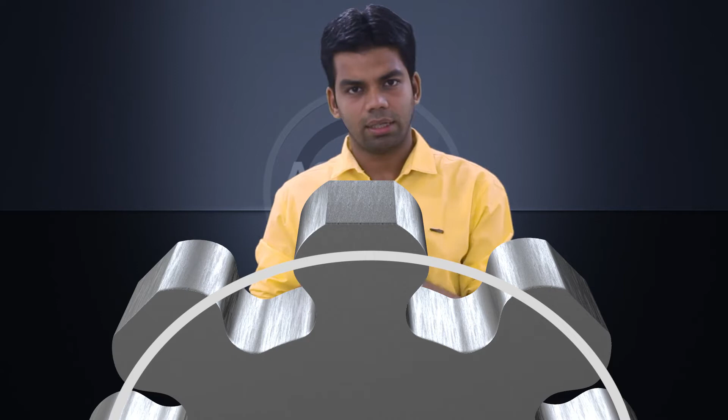The surface at the bottom of the gear, meaning the gap between the two teeth, is nothing but the bottom land. Now the area above the pitch circle up to the top land, the area between the pitch circle and the top land, is nothing but face. What do we call the area between the pitch circle and the top land? That is called face. And the area between the pitch circle and the bottom land is called flank. So these are a few important terminologies.

Next is fillet. As you can see here, a small curve is visible at the end of the teeth, where at the base of the teeth there is a small curve visible. That curve is nothing but the fillet.

Next is the circular pitch. Now what is the circular pitch? So we have seen about the pitch circle. Now in this arc of a pitch circle, if I measure the distance between a point on one tooth to the corresponding point on the next tooth, in this arc of the pitch circle, the distance from one point on a tooth to the same point on the adjacent tooth is nothing but the circular pitch.

Now how can we determine the value of the circular pitch? Very easy. Suppose the pitch circle diameter is d, so the whole circumference of this pitch circle is nothing but pi into d. Now how many teeth are there? Suppose the total number of teeth is capital T. So the circular pitch will be equal to pi into d divided by capital T. If I divide the whole circumference by the number of teeth, I will get just one circular pitch.

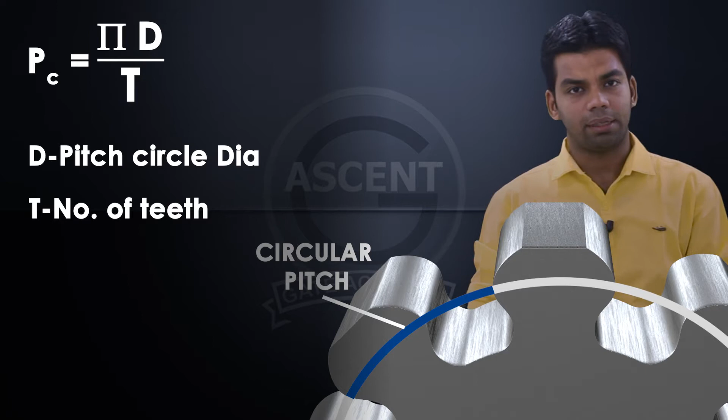The distance between one point of one tooth to the corresponding point of the next tooth is nothing but the circular pitch. So this circular pitch, PC, is equal to pi into d by t. Now, if two gears are in mesh with each other, obviously their circular pitch has to be the same.

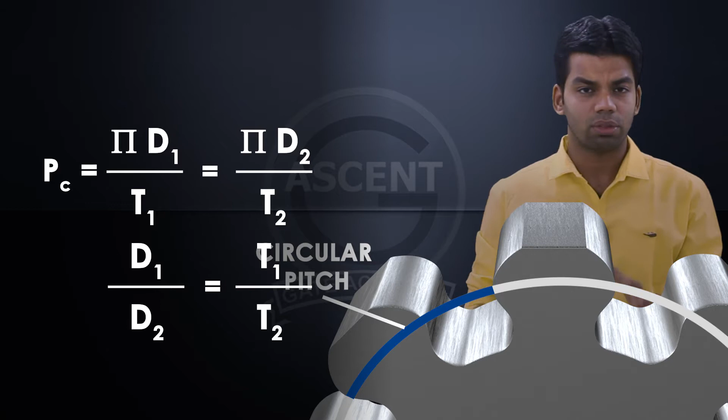So this is very important: if two gears are in mesh with each other, their circular pitch must be same. That means pi d1 by t1 should be equal to pi d2 by t2, where d1 and d2 are diameters of the two pitch circles, and t1 and t2 are number of teeth of gear 1 and gear 2. So you can conclude pi d1 by t1 equals pi d2 by t2, or d1 by t1 equals d2 by t2, or d1 by d2 equals t1 by t2. This is the necessary condition for two gears to be in mesh.

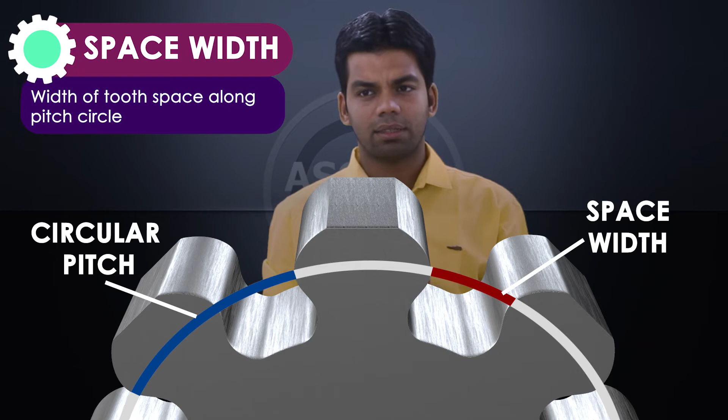Next terminology is the space width. Space width is nothing but the distance between the two teeth.

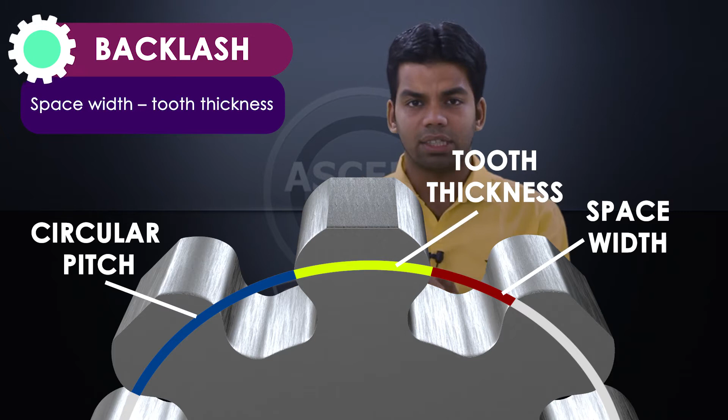So how can you calculate the backlash? Backlash is nothing but the space width minus tooth thickness. Whatever the space width is, subtract the tooth thickness from it, and we get the value of backlash.

Next important terminology is module, M. Module is the ratio of pitch circle diameter to the number of teeth. That means d by t is nothing but module, so M is equal to d by t.

Now we know circular pitch PC is equal to pi d by t, so you can write PC as pi into M. One thing we have seen is that for two gears to be in mesh with each other, d1 by d2 should be equal to t1 by t2, and d by t is nothing but the module. That means if two gears have to be in mesh with each other, their module must be same. Next is the diametral pitch.

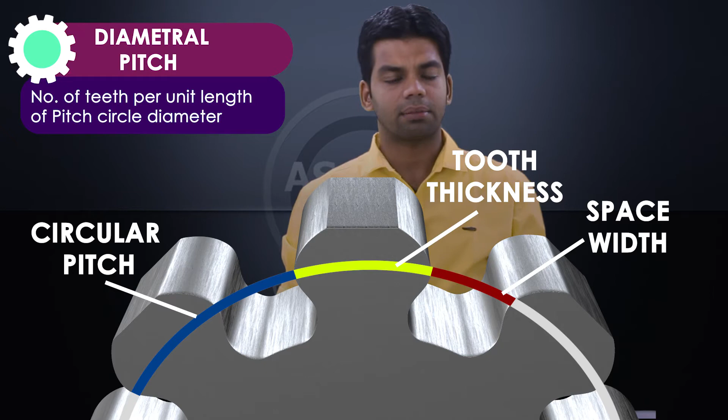Just the inverse of module is nothing but diametral pitch. So how can we define diametral pitch? It is the ratio of number of teeth to pitch circle diameter. The ratio of number of teeth T to pitch circle diameter D is nothing but the diametral pitch P, so you can define P as T by D.

Further, you can write P into PC, diametral pitch into circular pitch, will be equal to pi D by T into T by D, which is nothing but pi. So the product of diametral pitch and circular pitch is nothing but pi.

Next is the addendum circle. Now what actually is this addendum circle?

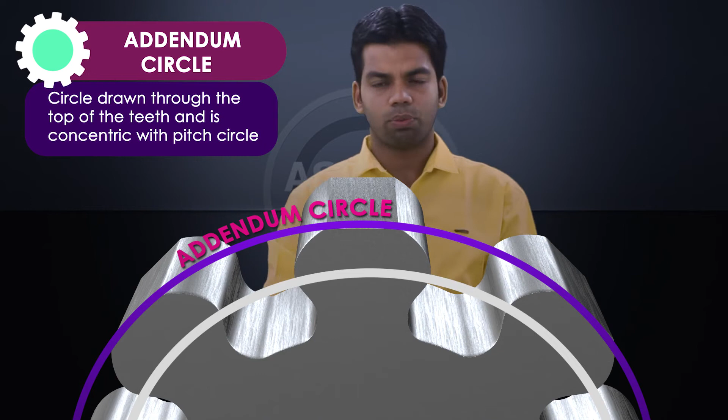In this gear tooth profile, if I join all the top points of the gear tooth, I will get one circle. That circle is the addendum circle. Similarly, if I join all the bottom points of the gear tooth, I will get another circle, which is the dedendum circle.

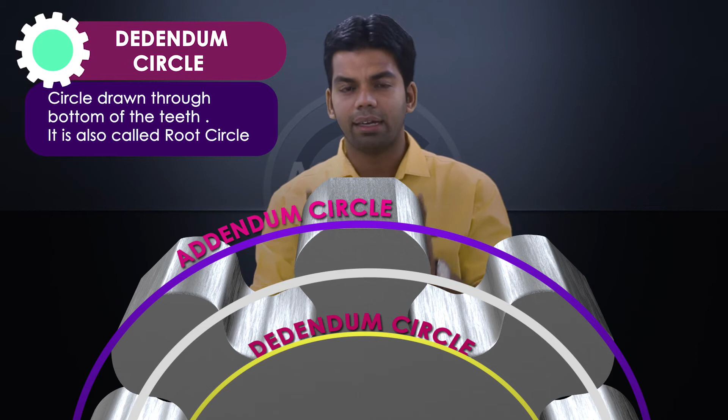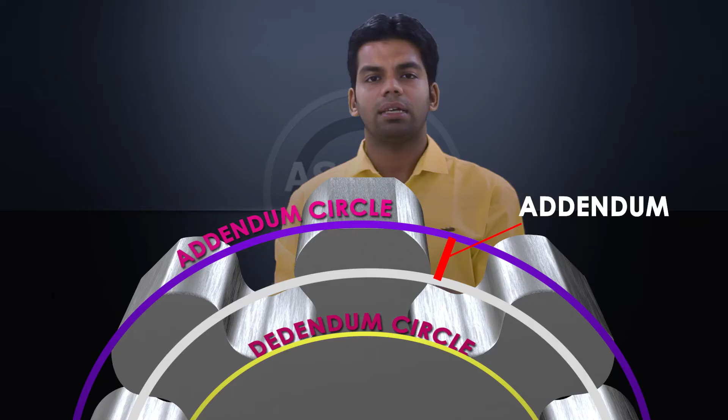Now, the radial distance between the pitch circle and addendum circle is nothing but addendum, and the radial distance between the pitch circle and dedendum circle is nothing but dedendum. The standard value of addendum is one module. If nothing is mentioned about addendum, you can take the standard value as one module, and the standard value of dedendum is 1.157 of module.

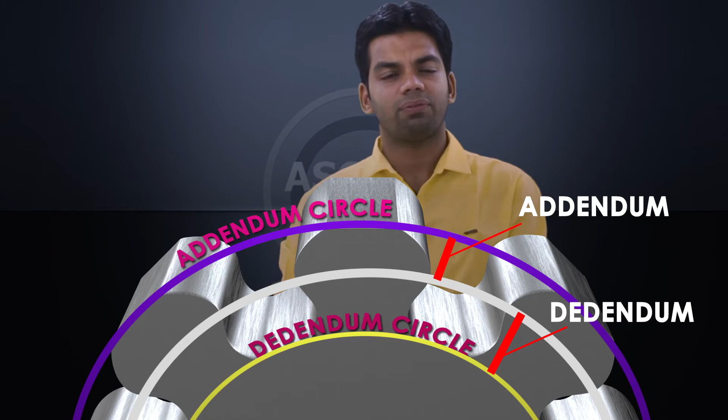Next is the full depth of the teeth. What is this full depth? The total radial distance of the teeth space is nothing but the full depth. That is how much depth this space is having, and that is equal to addendum plus dedendum. If you want to determine the full depth, that is addendum plus dedendum. Next is the working depth.

There is a difference between full depth and working depth. If two teeth are meshing with each other, you can see a small gap in between these two teeth. That small gap is nothing but the clearance, we will come to that. So what is the working depth? The total penetration of the second tooth into the first tooth is nothing but the working depth. How much the second tooth is penetrating inside the first tooth, that is the working depth.

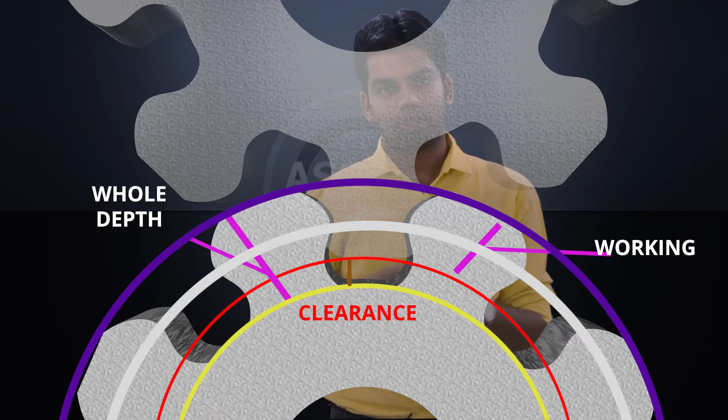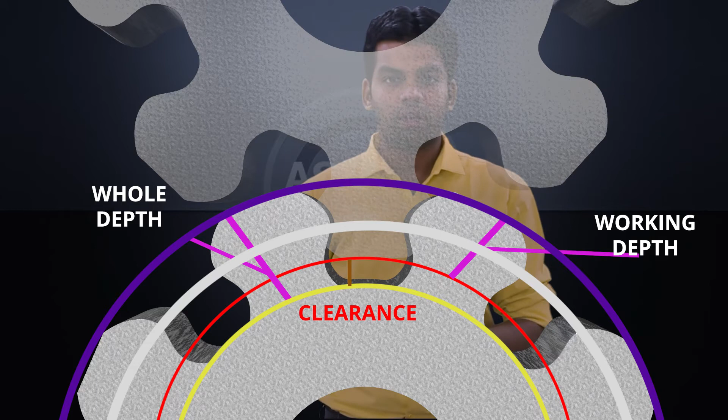Total depth is a different thing. Out of that, how much is working depth, meaning how much the second gear has penetrated into the first gear, that is the working depth, and that working depth will be equal to the sum of the two addendums. Let me show you what the working depth is.

I have shown you two different gears here. One is yellow color, which is gear number 1, and the second is green color, which is gear number 2. The blue line is the pitch circle of gear 1, and the red colored line is the pitch circle of gear 2, and the mating point between the two is nothing but the pitch point.

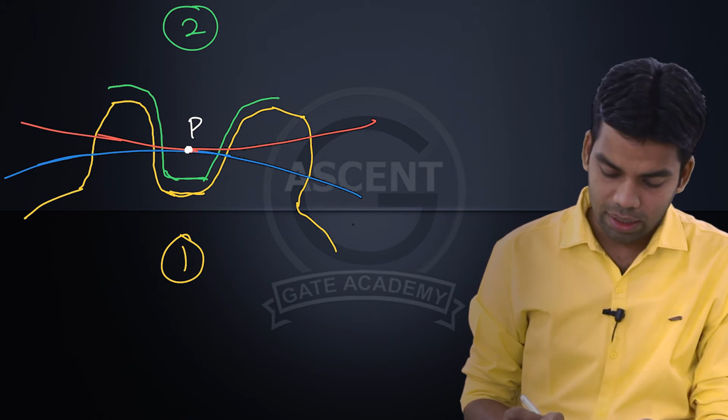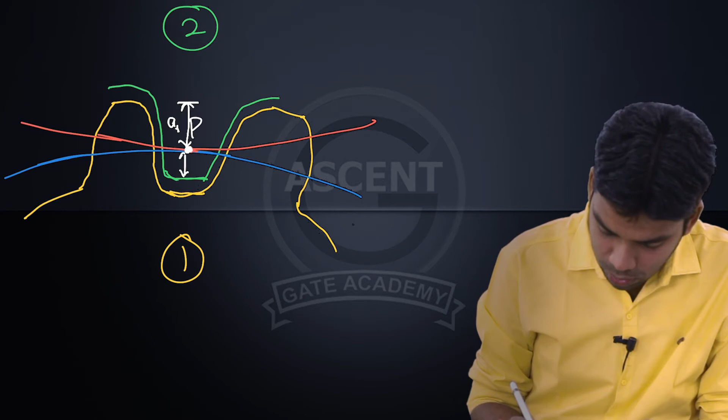Now what is working depth? Working depth is nothing but this particular total distance. This distance is the addendum of gear 1, A1, and this is the addendum of gear 2, A2. So total working depth will be equal to A1 plus A2, as simple as that. How much the second gear penetrates inside the first gear is the working depth, and that is the sum of the addendums of the two gears.

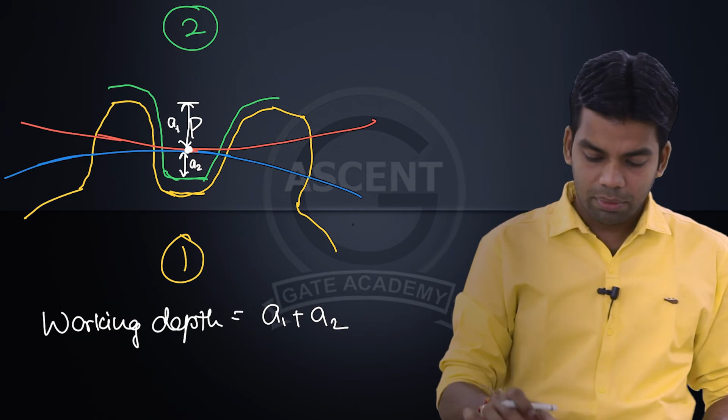Now another term I told you is the clearance. What will be the clearance here? Clearance is nothing but the gap between the two gears, this gap. This particular gap is the clearance. Now how can we determine the value of this clearance? This is nothing but clearance, C.

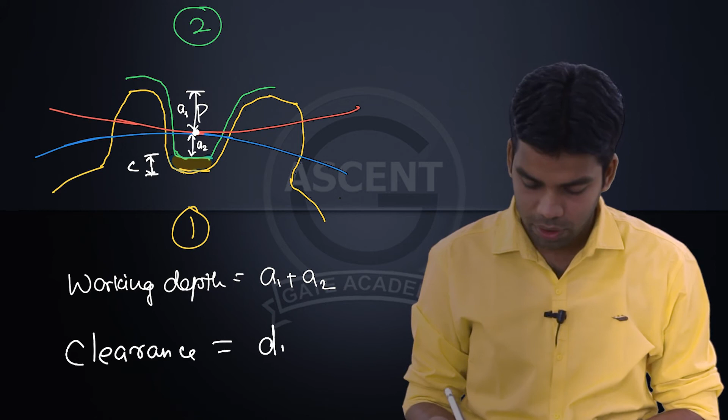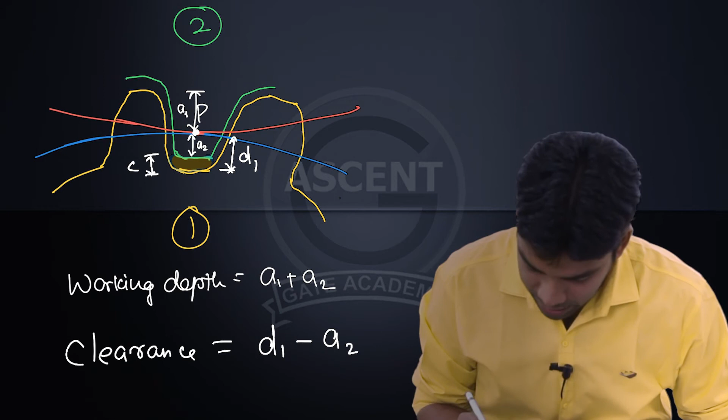This clearance will be equal to the dedendum of the first gear minus the addendum of the second gear. You can see this particular distance C is the dedendum of the first gear, D1, minus the addendum of the second gear, A2. So if I subtract these two, I get the value of clearance, D1 minus A2. This dedendum of the first gear can be written as 1.157 of m, and the value of m will be the same for both gears.

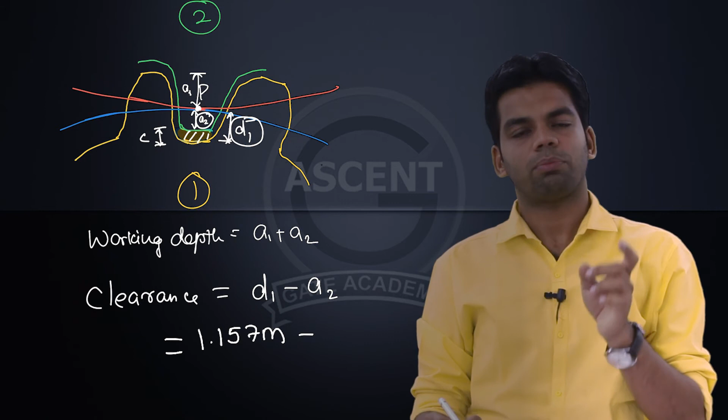So dedendum is 1.157 of module, and addendum is 1 times of module, so minus 1 times of m. So this clearance will be equal to 0.157 of m. This is the standard value of clearance.

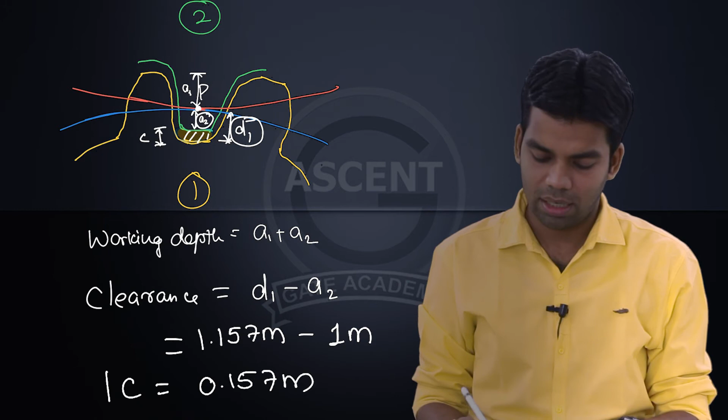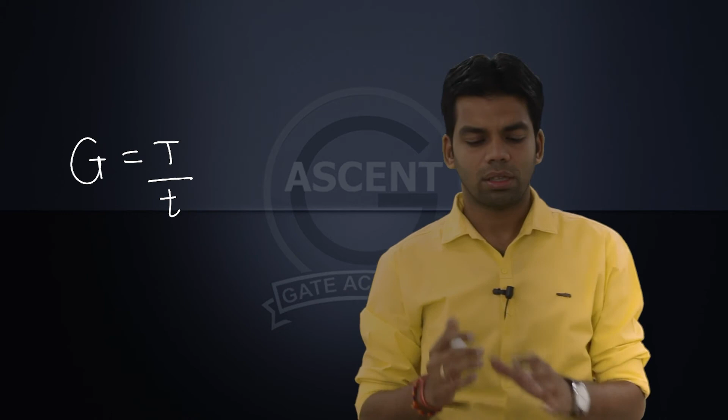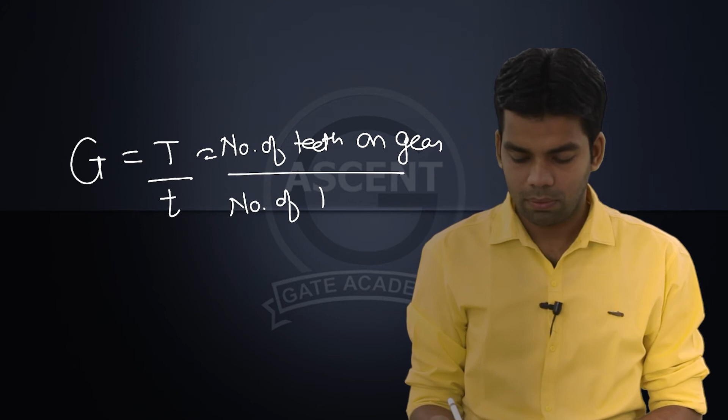Next terminology is the gear ratio, which we denote by G. Now what actually is this gear ratio? This is the ratio of number of teeth on gear to number of teeth on pinion. Generally the large size gear is termed as gear, and the small size gear out of the two is termed as pinion. So the number of teeth on gear to number of teeth on pinion is nothing but the gear ratio.

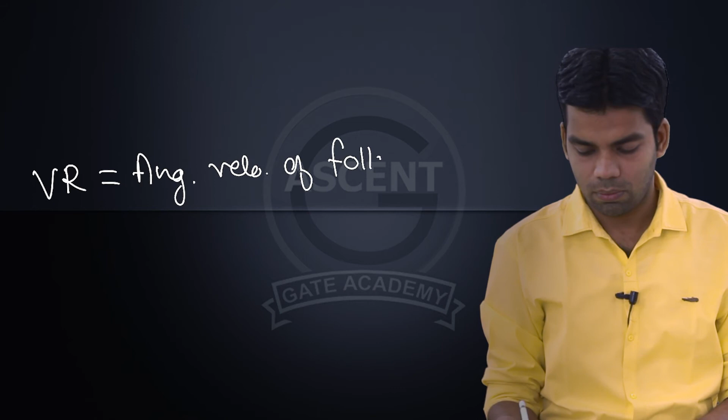Another related term is the velocity ratio. Now what is this velocity ratio? This is nothing but the ratio of angular velocity of follower. Follower means the driven gear which is getting driven, divided by angular velocity of driver gear. So the ratio of angular velocity of follower to angular velocity of driver is nothing but the velocity ratio. This will be equal to omega 2 by omega 1, where omega 2 is the angular velocity of follower gear and omega 1 is the angular velocity of driver gear.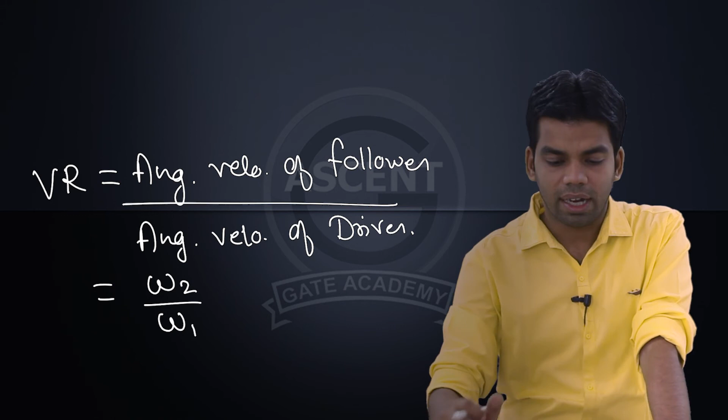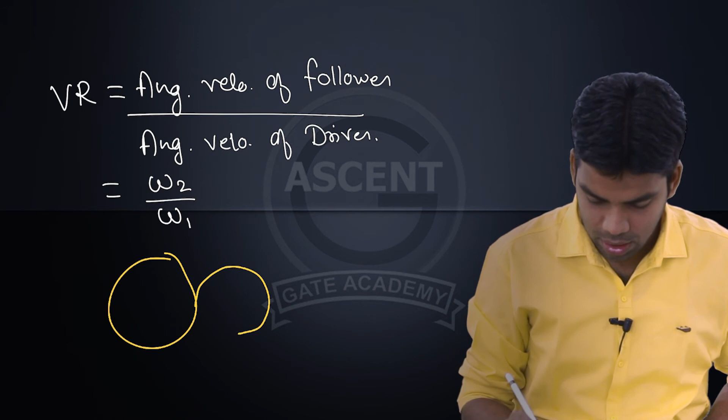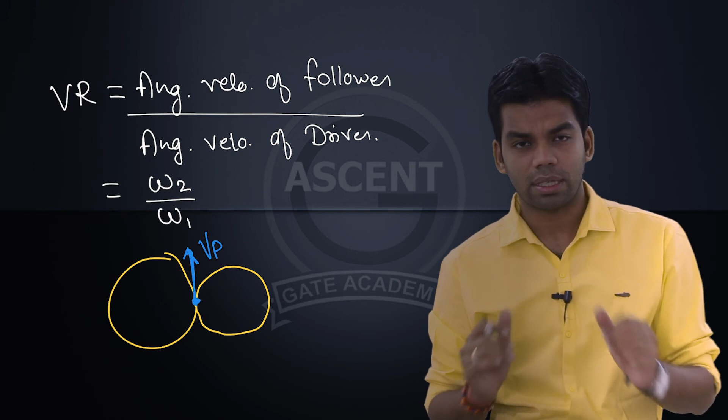Now another very important thing - I have told you about the pitch cylinders and pitch circles. Let's suppose we are assuming these two pitch circles which are transmitting the power. At the mating point, at the pitch point, the velocity of these two circles of these two gears must be same. Let us suppose that velocity is Vp. Because that is a common point, the velocity of both gears there will remain the same, considering the pitch circle of the two gears. So at that particular point, which is called the pitch point, the velocity of the two gears will remain same, will be same, because that is a single point - Vp will be same.

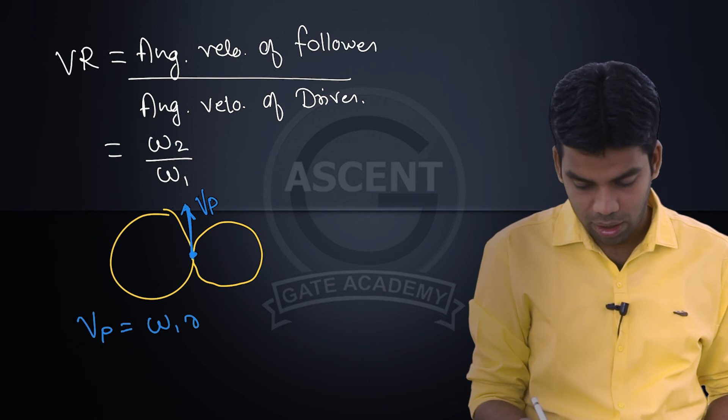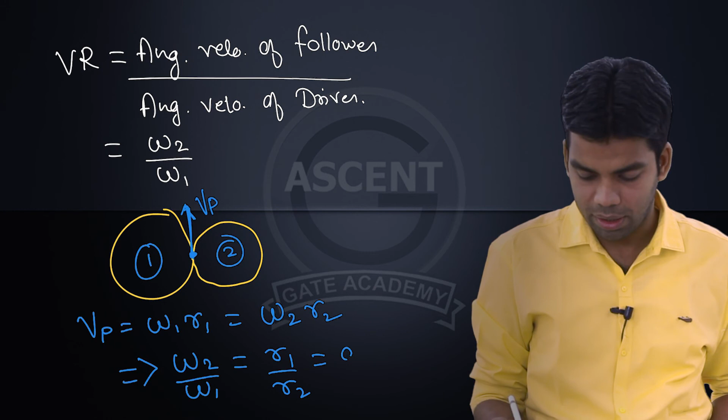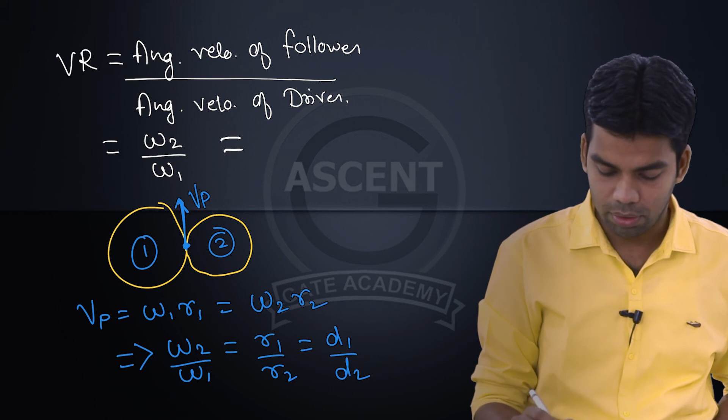Or you can say this Vp is equal to omega 1 into r1, which is also equal to omega 2 into r2. Let's suppose this is gear number 1, this is gear number 2. Since V is equal to omega into r, omega 1 r1 is equal to omega 2 r2, or you can say omega 2 by omega 1 is equal to r1 by r2, or further it can be written as d1 by d2. So you can conclude that this velocity ratio is equal to omega 2 by omega 1, which is also equal to d1 by d2. So this is nothing but the velocity ratio.

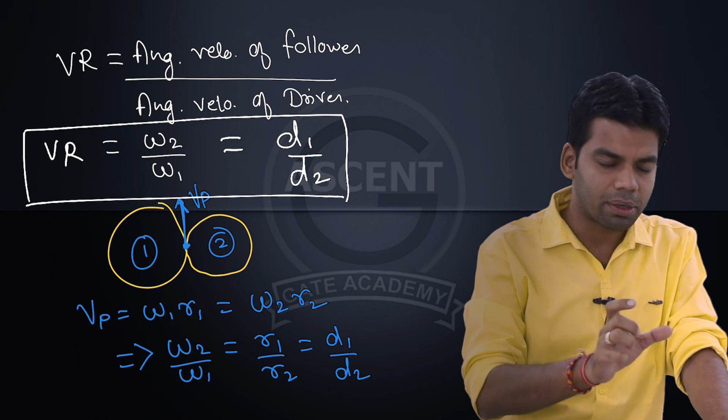So if suppose the velocity ratio is given as 1:5 and velocity of driver is given as 20 rpm, and if driver is having more number of teeth, then obviously the speed of driven will be more, so the speed of driven will be equal to 20 into 5, which is equal to 100 rpm. So here one has to use common sense, because many books describe this in different ways - different books describe it differently, some take 1:5 as velocity ratio, some take 5:1. Overall this is a reduction ratio - by how much scale we are reducing the speed of that particular gear, that is nothing but the velocity ratio.

So this velocity ratio, as I told you, is equal to omega 2 by omega 1, which is also equal to d1 by d2. Now this d1 by d2, as I told you, is also equal to t1 by t2, which is the number of teeth of the two gears. So you can say this velocity ratio is also equal to t1 by t2.